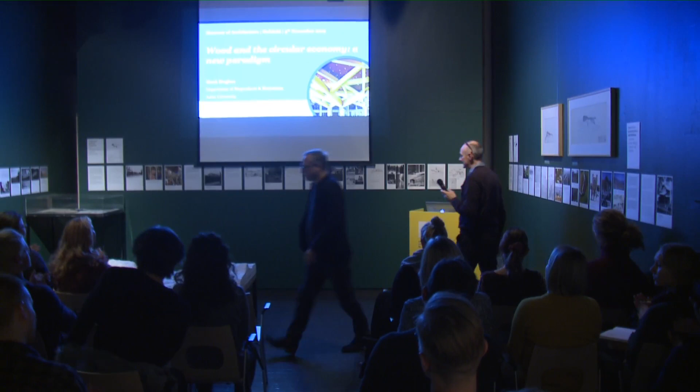Thank you, Pekka, and good evening. I hope you can hear me okay - I've got a bit of a head cold, so if I sound as though I've got cotton wool somewhere in my head, it's probably because I have. I would like to share some of the work that we're doing currently, and have been doing now for, I guess, 6, 7, 8 years at Aalto, looking at the issue of not just circular economy. When we started thinking about it, we didn't really think of it in terms of circular economy.

It was more about resource efficiency. I think the term circular economy hadn't really been coined at that point to any great extent, and it's only in the last, I guess, 5 years or so that it's really taken off as a concept. A little bit like sustainable growth, I think circular economy is slightly oxymoronic, in the sense that I don't believe you can have sustainable growth, and I don't believe you can have a truly circular economy either. There's always going to be losses in the system, but that's another point, maybe come on to that later in the presentation.

I have to confess to being very nervous because I've never spoken in front of a crowd of so many architects. So I'm a mechanical engineer by background. I found my way into wood about 25 years ago. So a lot of the concepts when it comes to the use of wood in buildings, I would have to say I'm not really that familiar with. So please, shout me down—maybe not shout—but just point out where I go wrong, by all means.

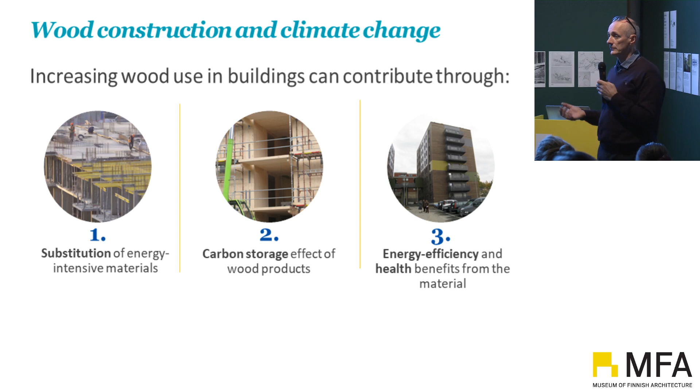But I think nobody really disagrees with the fact that there's a great potential to increase the sustainability of construction by utilising more wood.

So we certainly need some kinds of mechanisms or incentives in order to promote the use of wood in construction. It's not happening at a sufficient rate. In certain areas, residential buildings for example, it's well established. But in other areas, multi-story buildings for example, there's a lot that could still be done to promote and roll out the utilization of wood.

We are faced with some possible problems in the long run, namely supply shortages. We know we have a big forest resource here in Finland, with something like 100 million cubic meters of wood growing annually, of which we cut and utilize something like 60 million cubic meters annually. You would think there's potential to increase the amount of wood going into wood products of all sorts, not just wood construction, but also paper products, chemicals, fibers, and things like that.

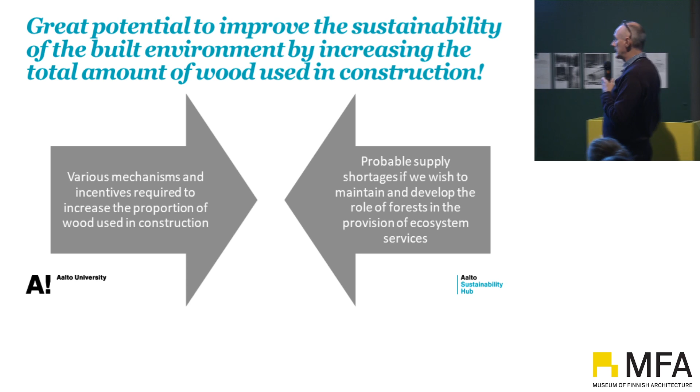But there comes a point where we can't take more out of the forest without seriously having to think about the loss in biodiversity and other ecosystem services. And if we think about maximising the climate change potential of utilising wood, we need to think about the resource. I think all too often we don't think enough about the resource base - where does wood actually come from, and what are the implications of utilising it?

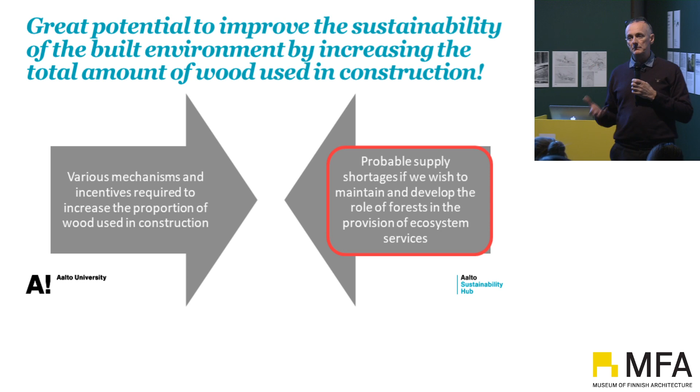So we need to have this in mind. There have been studies done to say that within the next 10 or 20 years, we're going to run into some problems when it comes to the sustainable supply of wood fibre. So the question really arises: what can we do?

How can we maximise the storage of carbon in wooden buildings? How can we maximise the benefits of substituting other materials, without compromising the ability of forests to sequester carbon from the atmosphere, act as a sink, and also retain biodiversity and other ecosystem services? That's a big question that we have to grapple with.

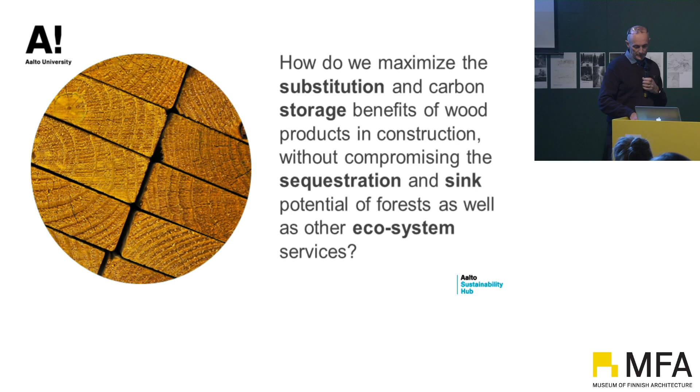And this really requires a slightly different approach to our thinking. We need to think at a very much a systems level. We can't think of things in isolation. We can't just think about only the wood value chain, only construction, or only forestry.

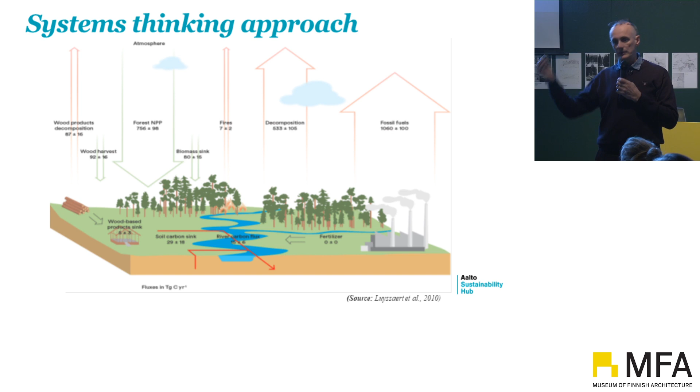We need to include all the various actors and stakeholders in this system to create a compromise and an optimized system that maximizes the potential of wood, both in the forest and in the built environment, to store carbon and mitigate climate change. So we need to think about it in this kind of systemic way, and this is something we're now starting to approach the problem from, rather than looking at single issues.

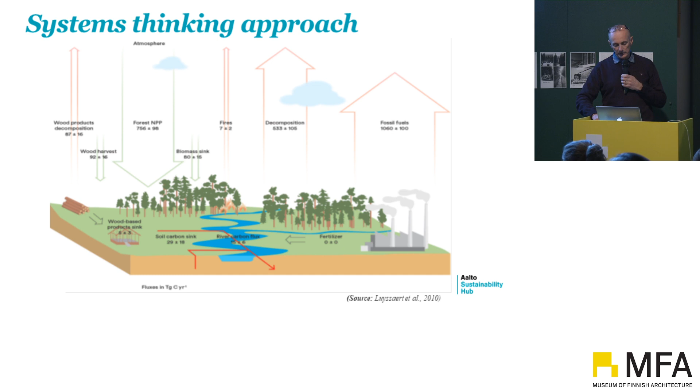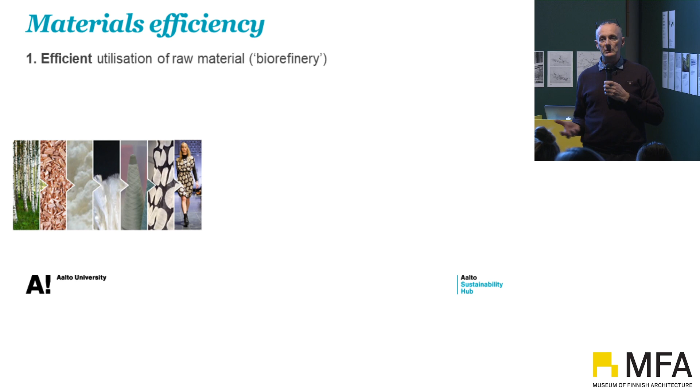So I was talking moments ago about resource efficiency, or materials efficiency, which is where we really started this discussion. And of course, we can think about efficiency in different ways. When we think about the application to the wood value chain, we could think about the efficient utilization of the raw material - this is something that the forest industries are very good at.

So a unit of biomass, a log, can be broken down into sawn timber, it can be broken down into chips that can be used as a feedstock for making various polymers or fibers, paper products, a whole range of different things. What's left over can be used in other material applications or to produce energy. So it's an efficient way of utilizing materials already.

There's a couple of examples here. Aalto has done a lot of work looking at producing, for example, alternative fibers to cotton and other fossil-based fibers for textiles. But these are based then on forest resources. So there are many ways in which we can increase the efficient utilization of biomass.

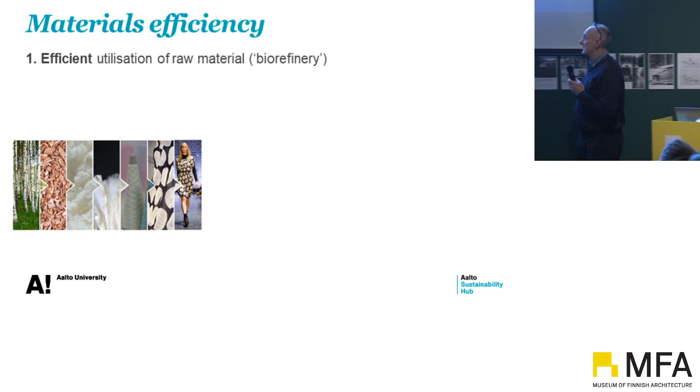Another way we can look at efficiency is through the longevity of products. Everybody says we live in a throwaway, disposable society, and I think that's true. In my lifetime, I think we've gotten away from repairing things to just throwing things away. It's crazy, utterly crazy.

There are plenty of examples of old buildings that have been around for at least centuries, maybe 10 times over. By having an extended use time, that has the benefit of storing the carbon for a long time and also being very efficient with the use of raw material.

The other thing we're certainly not very good at is thinking about what we do after the use of wood. When wood is torn down or removed from buildings, we usually end up with a pile of often broken bits of wood, which are then difficult to reuse. We don't really think about reuse much in products, full stop. Most products are made without really any thought to how we recover the materials.

Some of these are very valuable materials, certainly in the case of wood. The picture on the right, the bottom right picture, was actually done by a student group maybe 6 or 7 years ago. They decided they wanted to look at this idea of cascading - how could they actually produce something from waste wood? They came up with this idea for a coffee table. It was rather nice, it worked very well, and demonstrated that you can actually do something with just broken bits of wood.

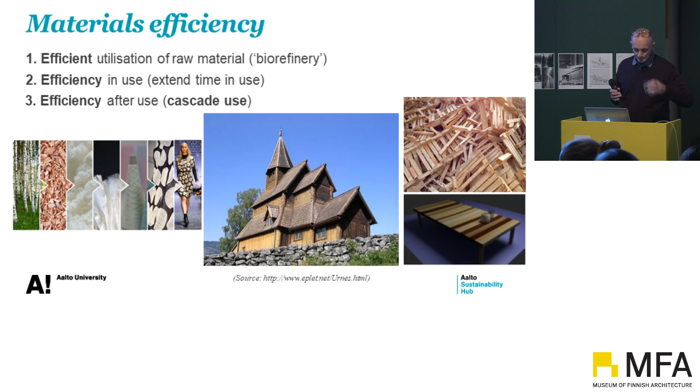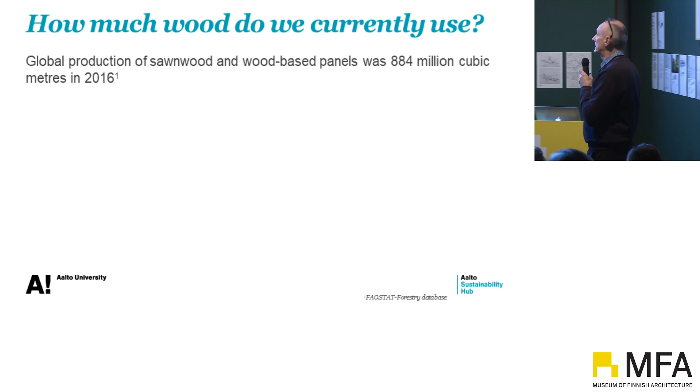We produced in 2016, according to statistics from FAOSTAT, about 884 million cubic meters of sawn wood and wood-based panels. To put that into context, that's a cube of wood product approximately a kilometre tall. As architects, you'd be interested to know you could put the Eiffel Tower 3 times on top of each other in that box.

Of course, not all of this goes into construction, but a large proportion does. So there's a lot of wood material going into buildings on a regular basis, and other products too. That is equivalent to about 750 million tons of carbon dioxide.

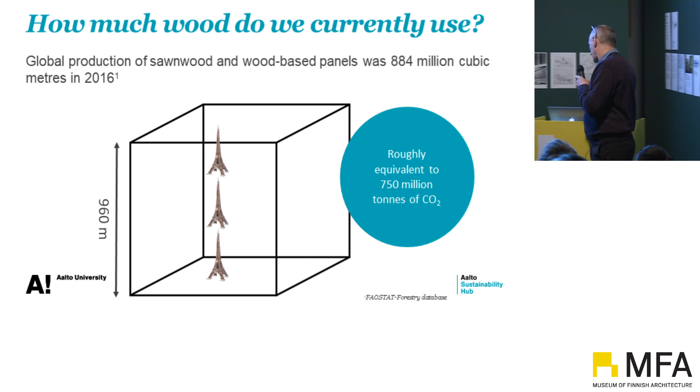So that wood that was manufactured and removed from the forest - you could argue that removing it from the forest creates an environmental problem, but by retaining the wood in solid, material form and placing it into a building, you are storing the carbon there and substituting other materials that would otherwise be used if you weren't using wood.

So we can think of the built environment of buildings as a little bit analogous to the forest. It's a kind of resource, a store of materials - an urban forest, if you like.

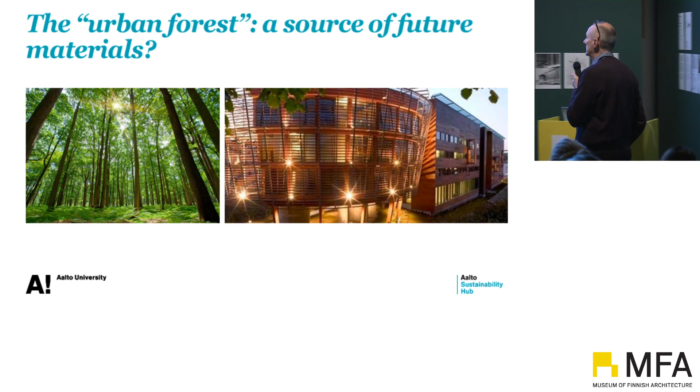How much is actually available? We've been involved in a few studies, and from a study conducted through a European project we were involved in, which finished a couple of years ago, approximately 32 million cubic meters of solid wood is present in residential buildings in Austria alone.

I haven't put anything on the slides here because I've only just had the thesis, but I've had a student working with me for the past 6 months looking into the potential amounts of wood here in Finland in residential buildings. The value she came up with was 17.1 million cubic meters - a very significant amount of material embedded in the building stock at present.

So why don't we use it? Why don't we actually make use of this? The prediction for Austria - and I think we'll probably find the same here in Finland - is that this amount of material will increase, so there'll be an increasing amount available to be utilized in the future.

One of the concepts we've been working with, and I'm sure Satu will also be talking about this, is resource cascading. The idea here is that rather than lose the quality or value of a material simply by disposing of it, you retain the value or quality by reusing it either in other identical applications or in other applications that have a high quality requirement.

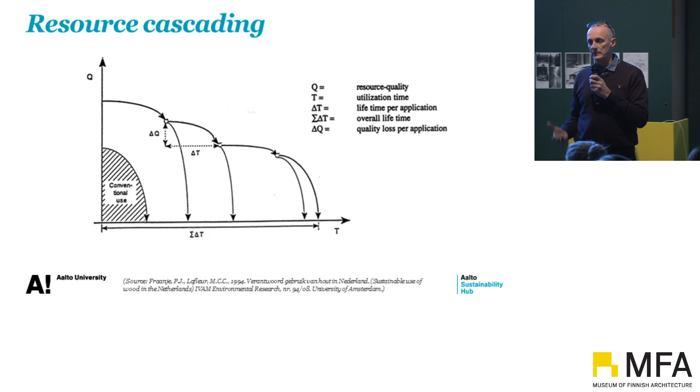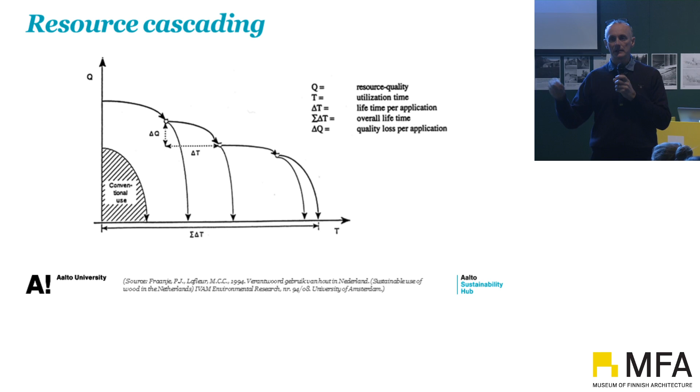And you can repeat this in a cascade until eventually, by the time you've reprocessed it several times, the quality has been lost and there's not much else you can do with it. But you have had a lot of utility, a lot of use out of that material throughout that time.

So this is the concept of cascading. Conventional use is what we do currently mostly: we have a material, we use it once or twice, and then throw it away. The idea with cascading is that we extend the period of time so the quality is retained for longer. If you think about carbon storage, we retain more carbon for a longer period of time, therefore we have a more efficient use of material.

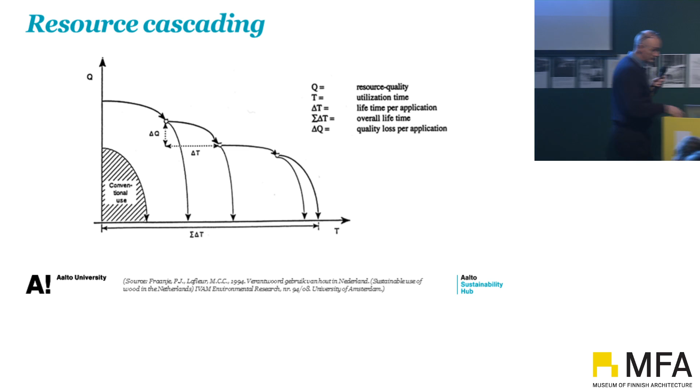Could you not give an example of a product where the service life could be extended like that? You've preempted my next slide. You're always doing that. I know.

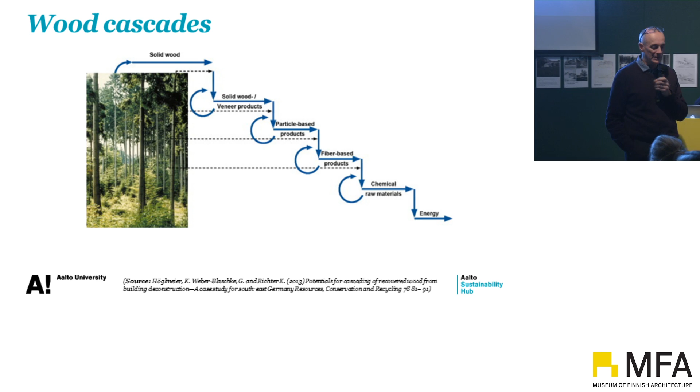So this is an example of a wood cascade. We might start out with, for example, solid wood, and then there could be subsequent solid wood products. It might be from a large beam that has to be reprocessed slightly to make a smaller beam.

And then once the beam has lived its useful life, it has to be converted into particles, which could be used to produce particle board. After that, when the particle board has maybe been in a piece of kitchen or bathroom furniture, it's reprocessed again to create fibers. The fibers can be used in some fiber-based product, maybe some form of packaging, and then even the fibers could be recovered and reprocessed, chemically processed into chemicals or textile fibers, and eventually reclaimed and used for energy production. So providing we don't lose material through the system, that material will always be available for energy production—it's just that we've made more use of it in intermediate products throughout that period of time.

But this is the situation currently. This is what we tend to do: we take solid wood, chip it up, and then produce energy. And that's not a bad thing necessarily.

Because although we could make more use of it, we also have to consider what other inputs we would need to create these cascaded products. If the inputs exceed the benefits we would actually gain from doing that, it doesn't necessarily make sense. Maybe an extreme example: if we had lots of fibers, we wouldn't want to try to stick them all back together to make a solid piece of timber.

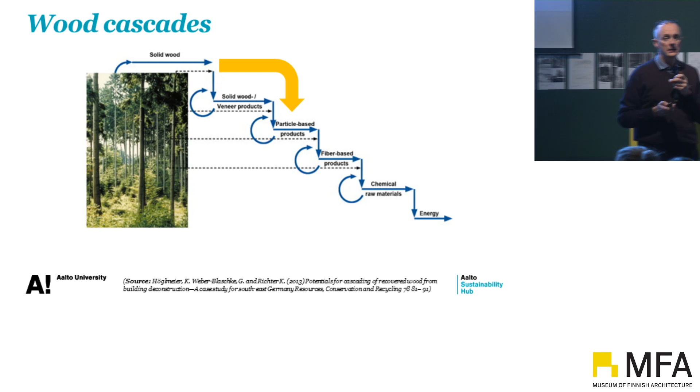But what we could strive to do is create a step in here, for example through the production of particle board. We don't do that here in Finland because we don't have a large particle board manufacturing base, but in many parts of Europe, Central and Western Europe, particle board manufacturers already utilize quite significant quantities of recovered material—not from buildings, but from things like pallet wood, because of the cleanliness of the material. So many particle board products are already incorporating maybe 70–80% of recovered wood in their production.

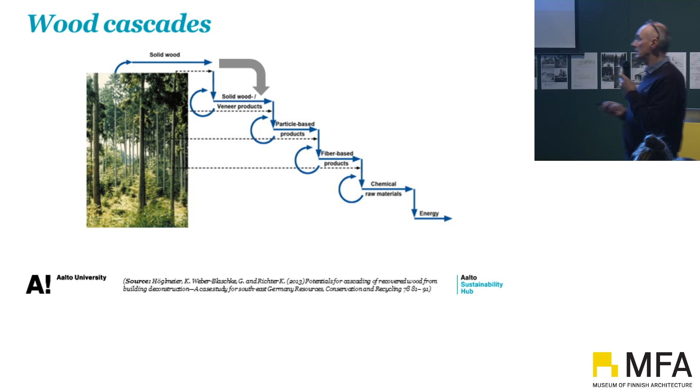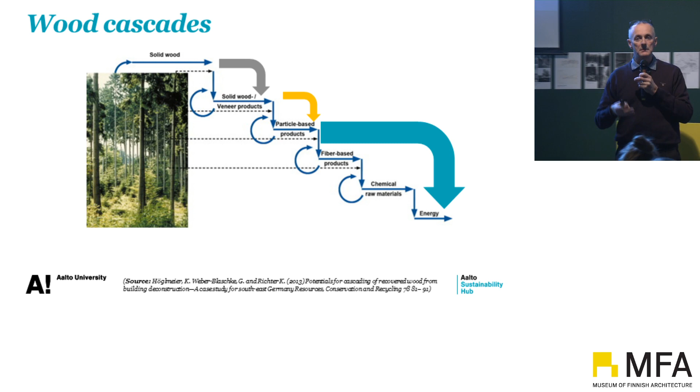And that particle board is then available for the production of energy at the end of the day. What we would like to see is actually another step where, first of all, the recovered wood would be utilized in a solid wood form before being converted into particle board and eventually burned. We may be able to put another couple of steps in there as well, but I think realistically, if we could go from solid wood to another solid wood application and then to particle board and finally for energy recovery, we would still have an important positive contribution to make.

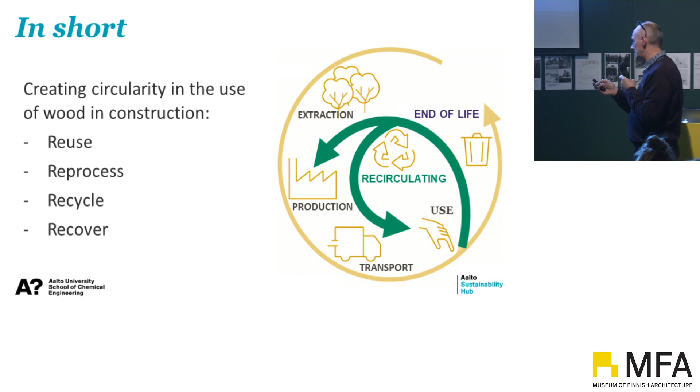So in short, what we're trying to achieve is, I think everybody's familiar with the terms reuse, reprocess, recycle, recover, reduce, reuse, recycle. It's well known. So if we could reuse components from buildings, either in existing or slightly modified form, that would be an ideal situation. If we can't do that, if we could do minimal reprocessing to enable the material to be reutilized in solid wood form, that would be great. If we can't do that, there'll be fractions we can't recover in solid wood form. We could then recycle that into particle board, or finally use it for energy recovery.

So we're trying to ideally create more circularity into the system. So what's the problem? Why don't we just do it? Well, this tends to be the issue.

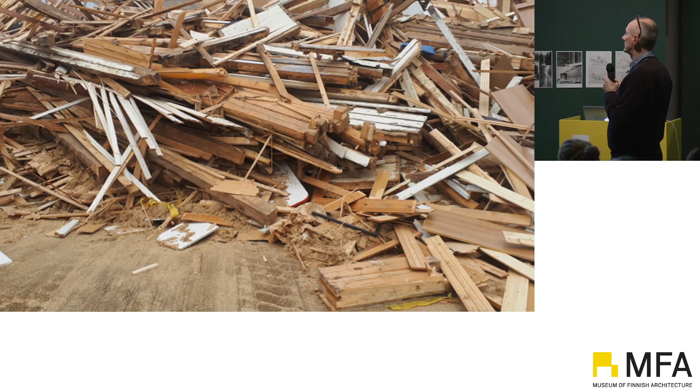Go to a demolition or waste management company, we tend to see lots of bits of broken wood, looking rather similar to this kind of picture. We have wood that's mixed with other materials, it's coated, it's in the form of systems, part of a wall system. There are often adhesives or insulation materials, certainly lots of metallic components in joints and things like that. These all make it rather difficult, and during the demolition process the only relatively quick way to do it is to smash it with a grab effectively, and that breaks up the wood. So a lot of the intrinsic quality of the wood is actually lost in the demolition process.

And these are some examples of the type of... It's a piece of art. Yeah, actually, yeah, I was going to say, I thought it's the right form, isn't it?

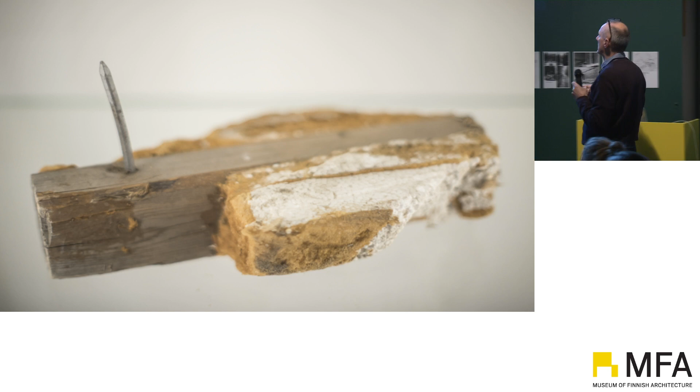Piece of art, these are actually taken from our exhibition in Aalto. But this is quite typical, you see a lot of nails protruding. Actually, I recovered some of this personally, and last weekend spent quite a few hours removing the nails so I could reprocess it. Other things you see in addition to nails are plastics, polymers, insulation materials, sort of polyurethane foam here. It looks like Styrox, so all sorts of different things that are adhering, which make it difficult to clean.

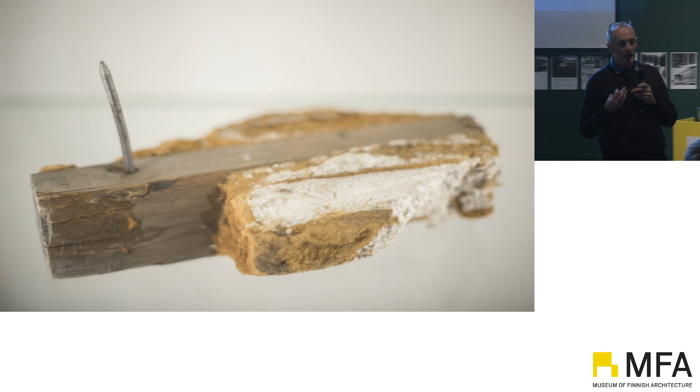And the other thing that's perhaps more problematic are the chemical coatings and preservative treatments that are often rather difficult to actually identify. So that's one of the problems with the practical recycling of wood.

So I'm going to mention a couple more projects. I'm very pleased that Petri is here because this is actually funded by Petri's program. The Circwood project - what we're trying to do is really to understand, if we were to recirculate, if we were to recover wood in a form that made it more suitable for cascading, what would be the implications in terms of sustainability?

So what we're trying to do is look at hypothetical scenarios where, okay, what if we were a little bit more careful with our dismantling of the buildings? We use some kind of smart demolition practices to recover the wood in a better state. What effect would that actually have?

Another thing would be, and I'm going to talk about this because I think it's an important point to make, is design for disassembly. What about if all the buildings that you build and design from here on in are built so that they can be fully dismantled, so you recover all the materials? That's a challenge to you as architects. If we could do that, what would be the impact?

If we could recover the wood materials from those buildings and reutilize them in different products - we could either use them in new buildings, different buildings. If not into buildings, what about into furniture? What about other such things? So what effect would this then have on the sustainability? So we're trying to model that, trying to understand what the impacts would be.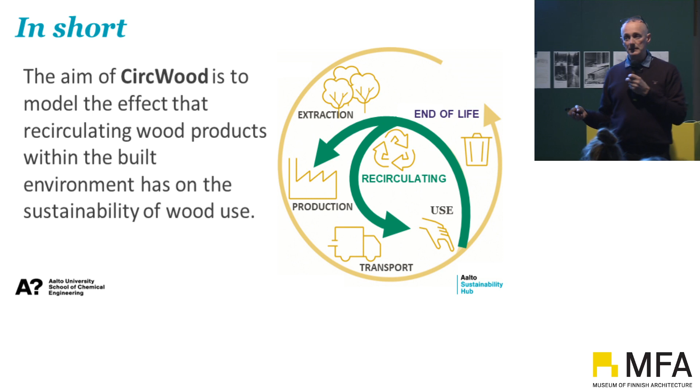It's challenging because it's difficult to assess what the current practices are, because they vary quite a lot. And what would smart demolition practices actually look like? And as for design for disassembly, well, we've really got very little clue about what that would mean in reality.

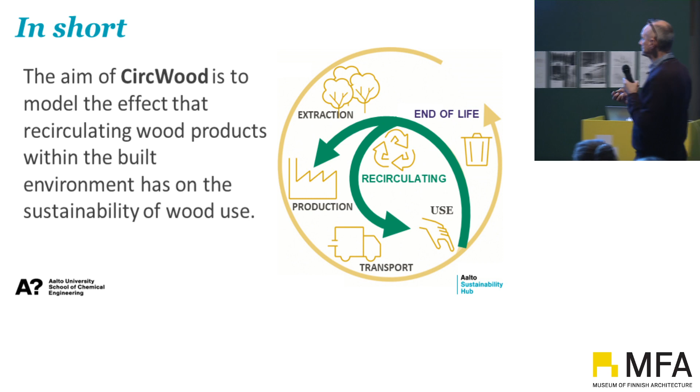So the idea would be that we would see what would happen if we could shift the emphasis from this end of the spectrum more to the reuse and reprocessing end of the spectrum by the introduction of a design for disassembly paradigm.

I think I've probably stated this already, but current demolition practices aren't really compatible with material recovery. They're compatible with quickly demolishing the building so it can be moved on to the next phase, which is usually rebuilding another building on the same site.

So we have another project we're now working on. We're entering the third phase of this project called Rewood. I'm not very imaginative with names for projects - this is Rewood 3, this is Rewood 2, and we had a Rewood 1. Not very imaginative. I'm an engineer, so that's my excuse.

But what would happen if we could design buildings that could be disassembled? Or maybe not disassembled - we're not talking about disassemblable buildings, we're talking about buildings where we can recover the materials and reuse them. Not a modular building rebuilt somewhere else, but a building where we can recover the materials and reutilize them.

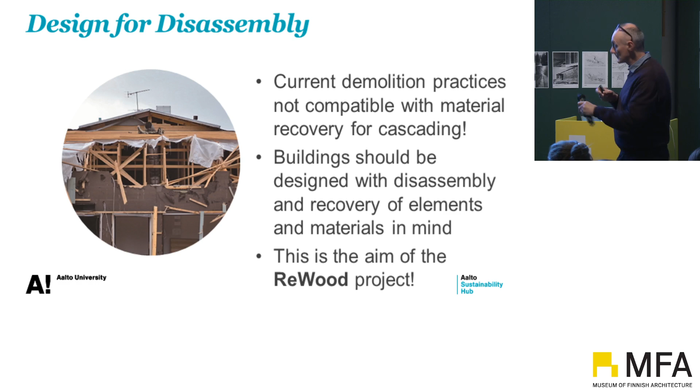So I'm going to close now. I'll just mention the projects we've got running, as they might make some connections here. We have a project called the GoWood project. This is funded by Climate KIC - some may be familiar with the EIT, the European Institute of Technology, KIC's Knowledge and Innovation Communities.

We have a project where we're working with the Ministry of Environment, Sitra, and UNFCCC to look at digital technologies to account for carbon. The reasoning is that if we can say with precision what the carbon content of a building is, and what implications design choices would have on that carbon content, that would help us create incentive mechanisms to support the utilization of wood and roll out wood construction.

We have another project, again funded by Climate KIC, working with partners in Sweden and Switzerland to develop a tool that would allow stakeholders, designers, architects, and decision makers to make decisions about materials used in buildings, to select the most sustainable choice. Often we believe it would be wood - it might not always be, but it would allow them to make an informed decision about the sustainability of the building.

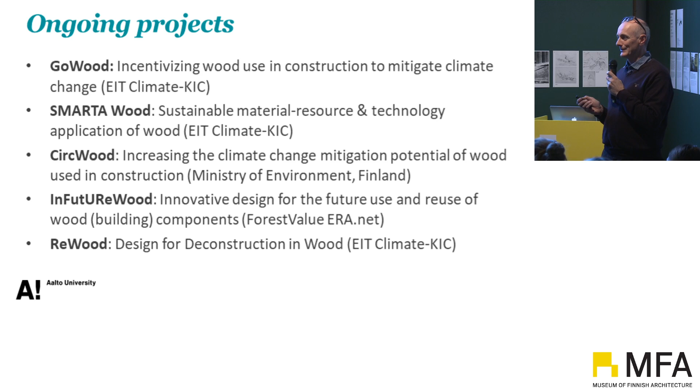If there's an invitation at a future point, I'd be happy to come back and tell you more about these projects as they continue. I think I'm more or less out of time - I managed to make 27, or 25, slides last quite a long time already.

Just some final thoughts, or aspirations. I think it's certainly important as we go forward that we adopt systems thinking and involve all stakeholders. I'm an engineer, a scientist, used to being in a laboratory by myself or with a few colleagues, not thinking too much outside that realm. But it becomes increasingly important that we involve all stakeholders in this process, because there's always the danger that we say 'let's all make wooden buildings' and then suddenly find we've run out of forest. That's not a very good situation to be in.

About this kind of materiality of products, then thinking of buildings as material stores. I know this is already changing, and there are very good examples of projects that are looking at buildings as material banks. I think this is something we maybe need to think more about. How can we consider that, yes, it's somewhere we have as a space to live or work, but also how can we think about the materials that actually go into the construction, to retain those and give them value. I think materials need to be given value.

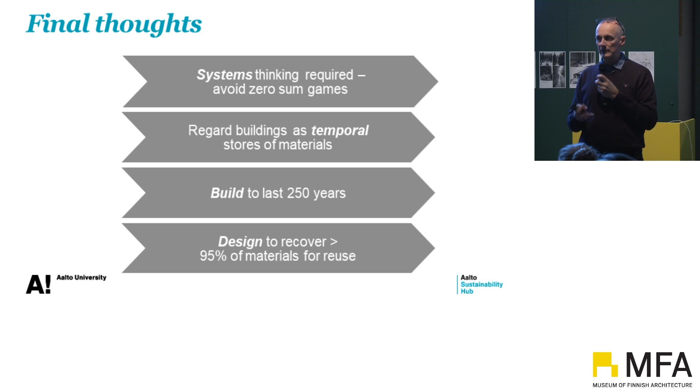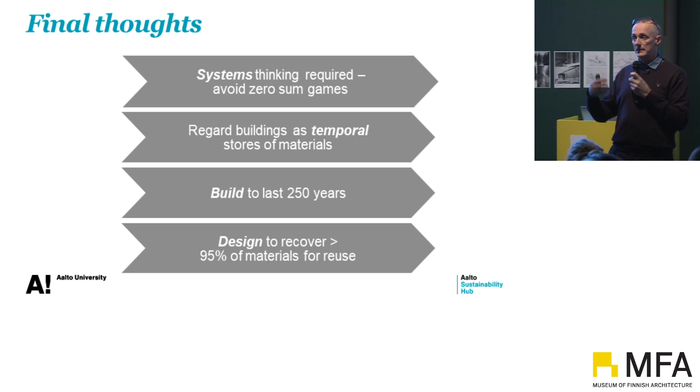Maybe when we're talking about design for disassembly, we should also be thinking about design for adaptation, so buildings can be more adapted to suit new purposes. And certainly we should be thinking too about designing buildings where we can recover the majority of the materials. I have to admit that a lot of products we use that go into buildings are actually quite complex. It makes it very challenging to recover the materials in the first place. So we maybe need to go back also to the point of the manufacture of the products, to think about how they could be produced in a way that would make the recovery of materials much easier.

Very happy if anybody would like to make contact, really happy to talk more about this. I'm always looking to engage, particularly with architects, to get their opinions. A lot of what you might think I've said is a load of rubbish, I don't know, but we certainly need to understand this in the idea of working with stakeholders. We need to work with stakeholders to try to understand what the issues are, what would help to promote the utilisation of wood, and also this additional part of the circularity, the resource efficiency with wood construction. So, with that, thank you.

Thank you, Mark. Nice that you presented yourself at the end, because I forgot to do it. So, professor in wood technology in Aalto. Do you have a quick question while Satu Huuhka, our colleague from Tampere University, will fix the presentation. Satu is part of the building environment in transition research group and docent in Tampere and researcher as well. Satu finished her doctoral thesis or degree about 3-4 years ago.

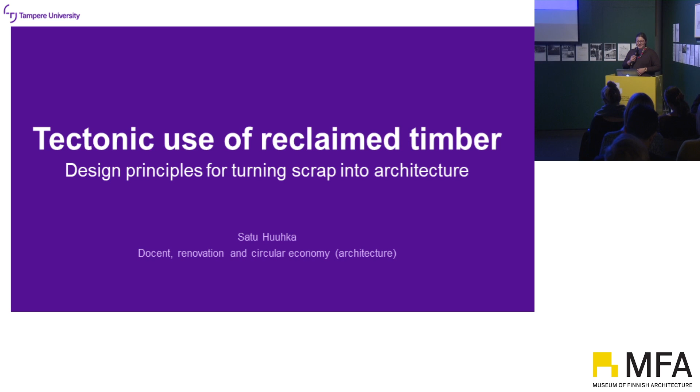So I'm going to talk to you about tectonic use of reclaimed timber and how to turn scrap into architecture. Like we heard in Mark's presentation and like we've heard in the media and elsewhere, timber has been proposed as one solution to climate change mitigation in the construction sector. And it is, but disposing or recycling timber can be more complicated than recycling concrete or recycling steel. We're not supposed to landfill timber, and if you burn the timber, it's not really recycling. Even though the energy production can be useful, it is not recycling.

Here in Finland, because of the way we've built in the past and still do, the majority of buildings that are demolished are timber buildings. They are generally very small buildings, so even though they make the majority in numbers, in terms of the material that originates from them, about 1/3 of the demolition waste is assessed to be wood, maybe a bit less. But it seems that wood might be the largest waste stream, together with concrete, as large as concrete waste.

As Mark informed us, if we reuse or recycle timber, we can lengthen the time that the carbon stays stored in the material.

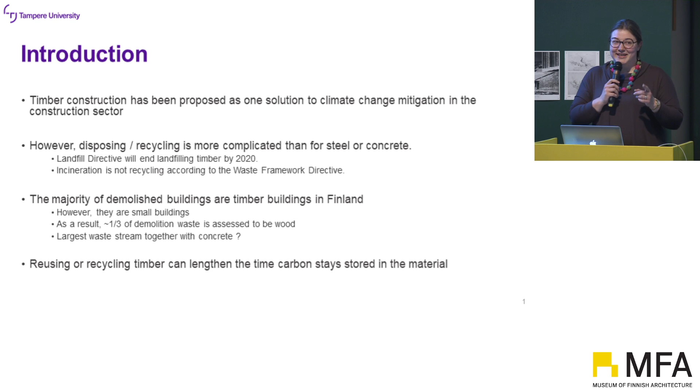You didn't show this image though. I think everyone knows this from the Ellen MacArthur Foundation, this is a redrawn version by my colleague. So here we have the idea of the circular economy system where we have the biological cycle on one side and the technical cycle on the other side.

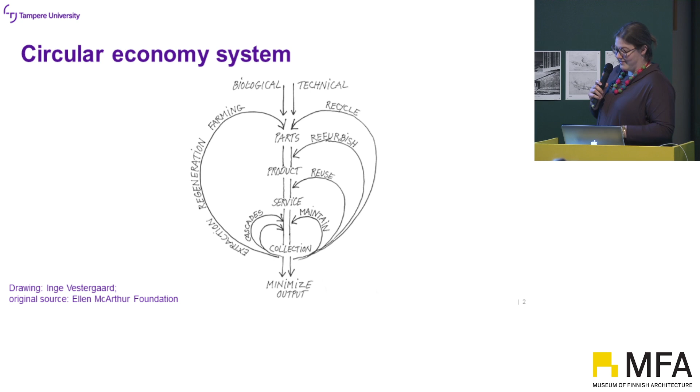Now you can think that, okay, wood is biological, so it can enter this cycle quite easily. And were we to build like we did in the old days, that would be true, in the archaic way, where almost all of the material in the building was wood. But the way we build today, that's not exactly true anymore. The way we use wood in buildings, it's engineered wood, so it doesn't automatically enter the biological cycle. Like Mark mentioned, it has glue, paint, and other substances that prevent it from entering the biological cycle. So we should actually treat it as a technical material rather than a biological one in terms of the circular economy system.

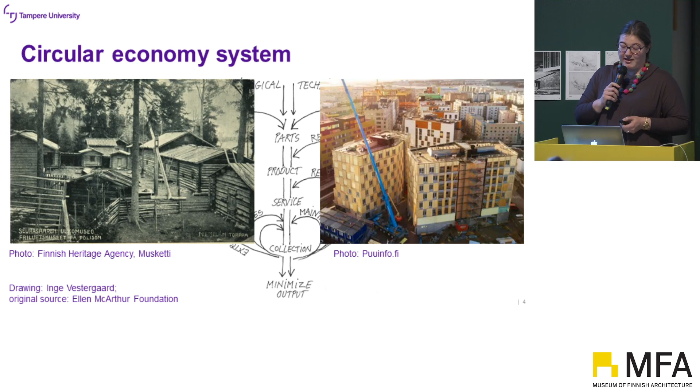This is basically the same image that Mark already showed you, the stages in which you should proceed. You should start always by preventing the creation of more waste, and then reuse, recycle, and utilize in other ways. This is basically the same as the cascading cycle.

If we translate that to buildings like Mark did, we have what he mentioned in the case of new buildings, designed for deconstruction, but even more importantly, the service life extension. Every year, the amount of new buildings is only 1% of the existing stock. So whenever we are talking about component reuse or material recycling, we're actually dealing with that 1%. It's more important to work with the existing stock to extend the service life, because that's where you can achieve most impacts.

However, I'm not going to talk too much about that today, because I'm also talking about reuse and maybe bringing it a bit closer to construction. So I'm afraid Pekka will have to arrange another lecture for the repair point of view.

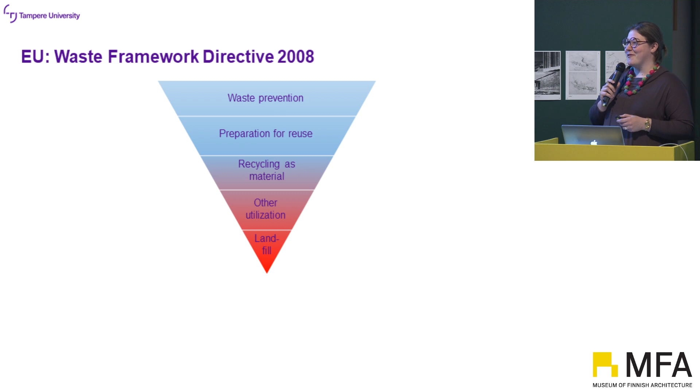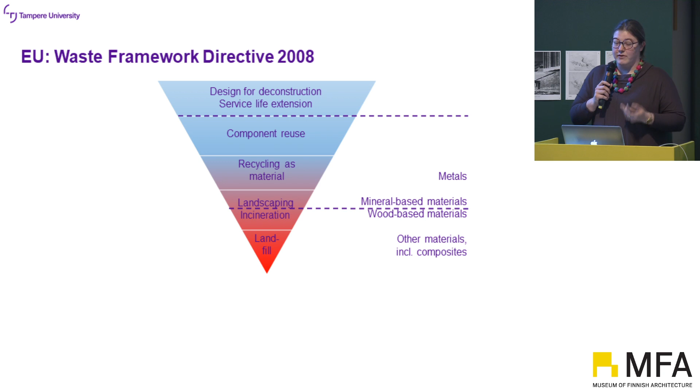In the EU, we have a target that we should be able to utilize 70% of the construction waste as material. That would mean reusing, recycling, or also some landscaping actions can be considered to belong to those categories. And here, wood is a little bit problematic, because what we do is that we incinerate it to create energy. So we should find a way that we could also increase the level of quality in the wood utilization.

If we compare it to the other materials, such as concrete or steel, here you can see what different options we currently have for reusing, recycling, or other utilization. And as you can see, we don't really have that many options here. One of maybe the problems with wood is that to recycle wood, all we can do is make fiberboard. Of course, there's always room for innovation, but if all we can do is fiberboard, you can't build structural frames out of fiberboard. So to build structures, reuse is currently the only feasible option that we have.

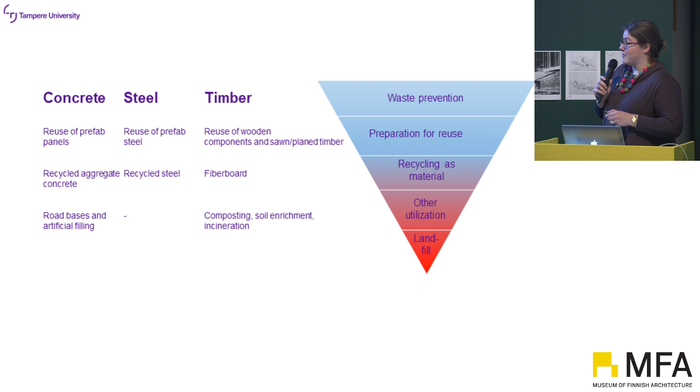So it interests me as a researcher what we could do here in the first steps of this process. A large part of my research has focused on the properties of demolished buildings, because I wanted to understand the properties of these materials and also the properties of the buildings that are being demolished, and maybe to think about how we could avoid that demolition in the first place.

But if we take, nevertheless, the viewpoint of the material, looking at the buildings that are being demolished at the moment, we can say that these are the two basic types that are the most common. The wood waste comes from these small buildings, which are either the traditional log buildings or the post-war reconstruction era buildings with balloon frames.

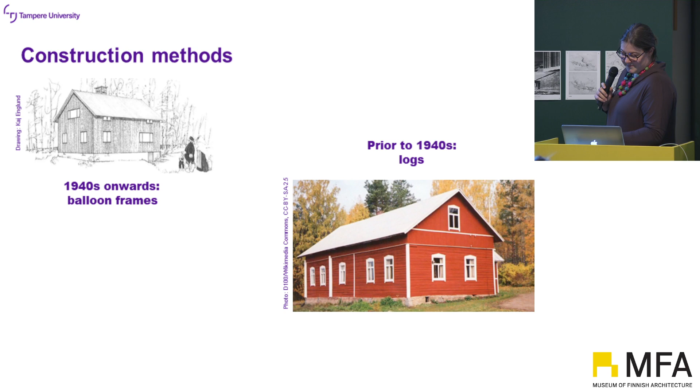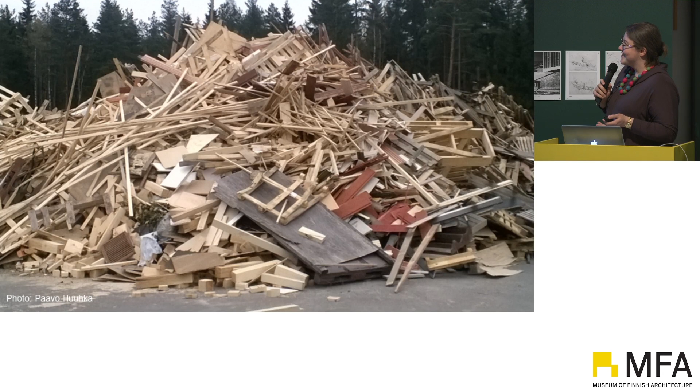And the challenge is, like Mark said, that when the material comes from the demolition site, it doesn't look like this. I have the same image as you did, almost the same. It looks like this. And the reason is the way we demolish at the moment.

It would be possible if we use different kinds of demolition methods to get more value out of the demolished material. Mark's student, Daishi Sakaguchi, made a field study where he followed the demolition project of a daycare center, and he recorded what happened to the length of the timber components in that process. There are some cross-sections of timber which retain their length quite well, like the smallest one and the largest one. But the cross-sections in the middle had a really drastic loss of length as a result of the demolition.

So if we wanted to avoid that, we should employ deconstruction practices that would be more labor-intensive and use less machinery than the ones that we currently use. That way, it would be possible to bring the recovered material closer to the virgin material in terms of its properties.

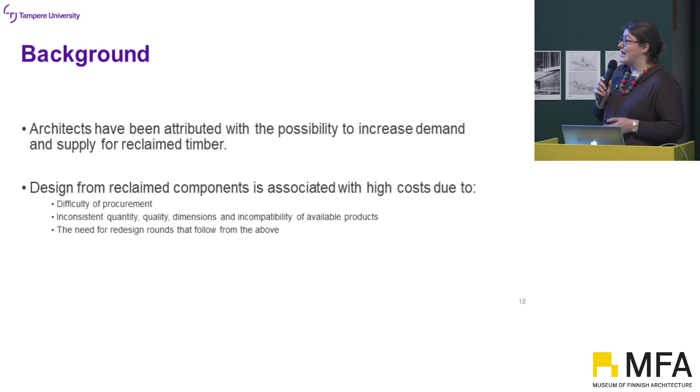And even if we use the best deconstruction practices, there are still challenges because if you use reclaimed components, it might be quite difficult for you to procure them. Where do you find the material that you're looking for? The quantity and the quality is inconsistent, the dimensions may be inconsistent, and they may be incompatible with current modular grids, let's say, and you might have to do a lot of redesign to overcome this problem.

So one of my key points is actually that the reclaimed timber is not the same material as the virgin timber. We should think of it as a completely new material in order to increase its use.

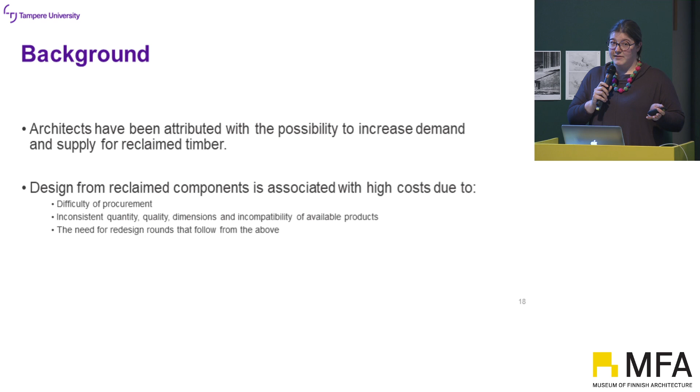And this is where we get into tectonics. I don't know if you're familiar with this term. Would you maybe raise your hand if you are? Okay, not too many, some, yeah?

So I have a couple of quotes here to introduce you to tectonics. It's one of my favorite theories of architecture. I'm a sucker for it. Ole Egholm Pedersen has said that structures are tectonic when the material and technique have a significant impact on the initial idea about form in such a way that the final structure can be said to be a consequence of the material and technique.

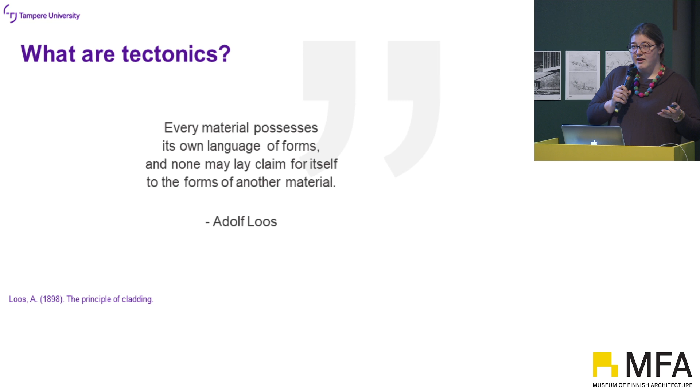Another way to put it is what Juhani Pallasmaa said: tectonic form derives from properties of materials, structural logic, and the crafts of making. Or the way Adolf Loos said, every material possesses its own language of forms, and none may claim for itself the forms of another material. So it is about finding an architecture that emerges from the material.

One more way to say what tectonics is about uses the example of the brick. This is from Louis Kahn. He used this in his teaching.

If you think of brick, you say to brick, 'What do you want, brick?' And brick says to you, 'I like an arch.' And if you say to brick, 'Look, arches are expensive, and I can use a concrete lintel over you. What do you think of that, brick?' Brick says, 'I like an arch.' The point being here that when brick is a material that doesn't have good tensile strength properties, you cannot make a straight lintel when using bricks. You have to make an arch. So arches are what is natural to bricks,

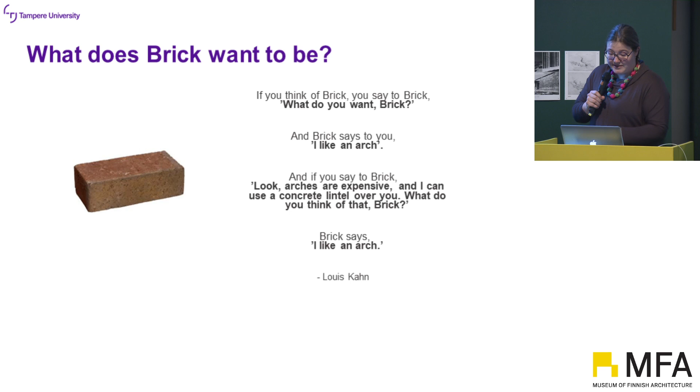Engineers have studied the properties of reclaimed timber, and they have actually found that in some aspects, aged timber is better than new timber. This is something that architects sort of know. But also there are some properties where the aged timber is inferior to new timber, and these just have to be taken into account when buildings are designed or structures are designed.

In brief, we could say that reclaimed timber is harder but more brittle than new timber, which you might have experience of in case you have ever deconstructed very old structures. Very hard, but can be quite brittle.

Reclaimed timber is also short. Daishi's study showed us that, but even if we use the best deconstruction methods, we still might have some damage in the wood that has to be cut out. And even if the nails are not too badly bent and you're able to deconstruct the piece, you might have

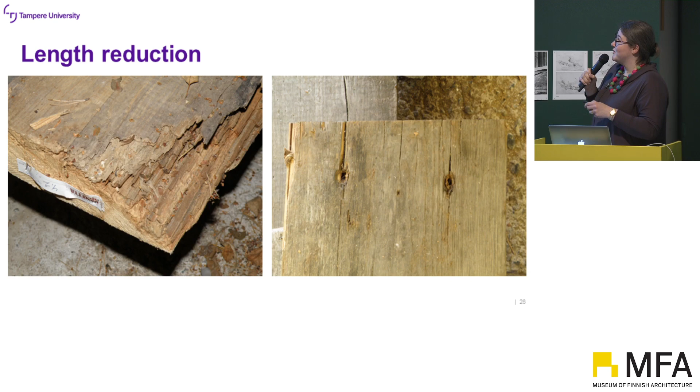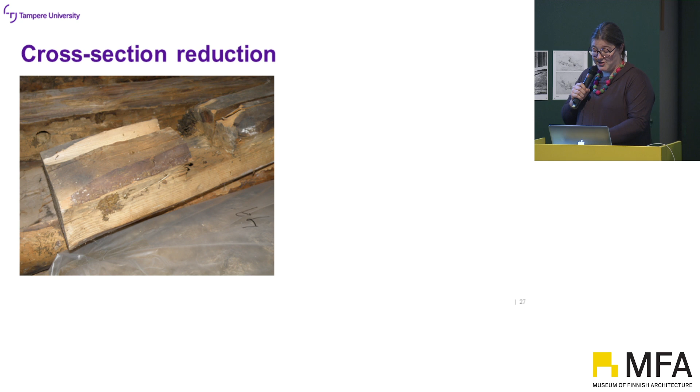these holes which might be unacceptable for you, so what do you do? You cut it, and it's shorter than it used to be. You also find these notches of different kinds, like here. So in this log you have a reduced cross-section in comparison to virgin timber. And of course, in many cases you can find that your timber components already have some kind of surface treatment. There is a paint, there is a color that exists.

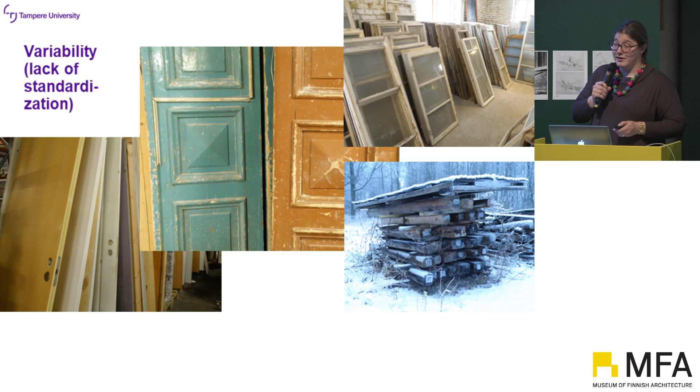And the pieces and bits that you can recover are very varied. They are not standardized. And this is what you have to deal with if you want to design out of reclaimed timber.

So we made a little experiment with students some years back. We have this, or had this course, it's been discontinued, but we had it, Finnish wood architecture at Tampere University of Technology, nowadays known as Tampere University. And this was a part of a project of ours, reuse, repetitive utilization of structural elements.

I gave the students the task to design out of reclaimed components. So I had 36 students, and they were divided into two groups. Half of them were designing an allotment garden cottage. So that was supposed to be like a product type of building, not a unique building, but something that can be repeated. And the other half was designing a cafe pavilion, which was more of a unique case, only to be constructed once.

So in terms of research, this can be considered a design simulation. The students simulated design by doing this exercise. And then afterwards, I made a qualitative analysis of the graphical material and also the essays that the students produced. And the results of this study have been published. This is openly available, so if you become very interested, you can find it online.

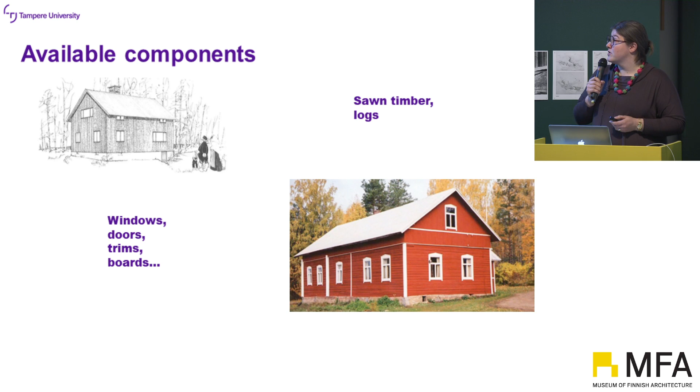The allotment garden cottage, this is what it is if somebody is not familiar with the term - a small cottage not intended for permanent habitation. And the students were to use for these projects any kinds of materials that you can procure from these typical buildings that are demolished: sawn timber, logs, windows, doors, different kinds of trims and boards.

For the cafe pavilion, which was to be located in the Pispala neighborhood, the students could also use glued laminated timber from this storage hall - these large-scale components. It's since been demolished, it no longer exists. They could choose what materials they would like to use. And out of their projects, I was able to distill these 10 principles for reuse design.

Divide the spatial program into smaller units, divide elements into smaller units, avoid equal spans and dimensions, distribute functions for different members, use efficient forms for long spans from short pieces, define ranges instead of fixed properties, rotate and repurpose, select the application according to the properties, combine creatively, and finally let the patina speak.

I will show you some examples of these. And on each slide you can actually find a quote from one of the students from their essays as to what they were thinking when they were making the project.

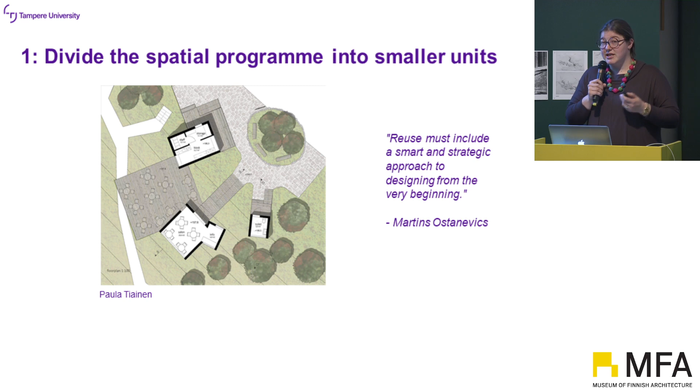The first principle being dividing the spatial program into smaller units, and that is simply because, like you just heard, the reclaimed timber is short. So if you design a very large hall, it might be quite difficult to find any spans to actually create that space. So if it is possible from the start to think about the spatial division so that you have smaller rooms, that could enhance reusing timber, like Paula Tiainen has done in this cafe pavilion. It's not necessary to actually separate the rooms physically like has happened here, but just to have smaller units instead of very large ones.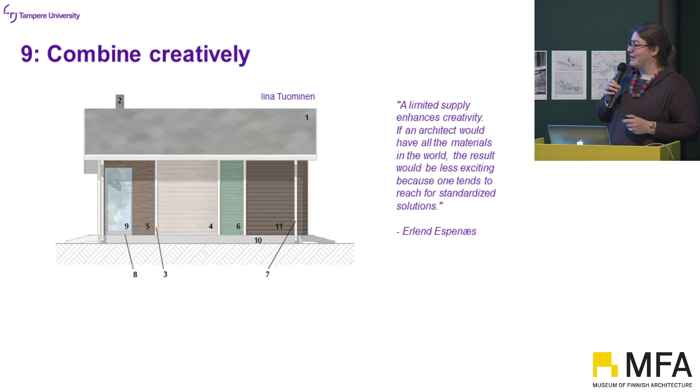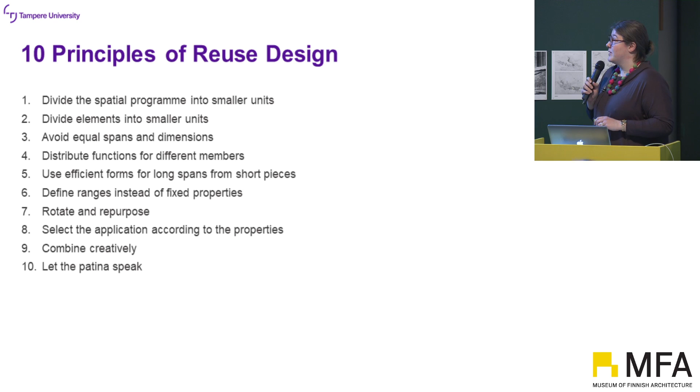So these have been the 10 principles of reuse design that could be distilled from the student projects. And to continue a little bit about the last one, the patina, I would like to talk to you also about spolia in contemporary timber architecture.

Is spolia a familiar term to you? You can raise your hand if it is. To some, yes.

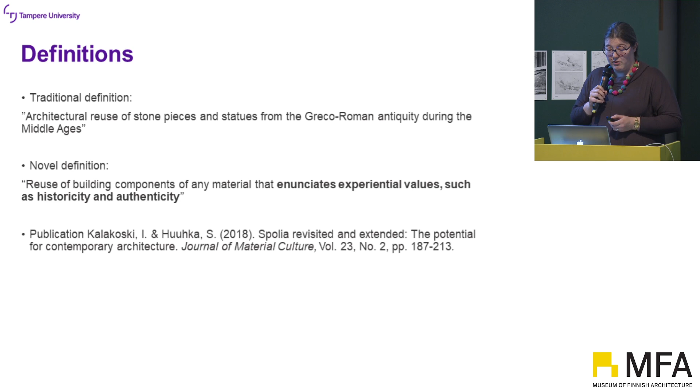And we propose that in order to be spolia, the reuse has to fulfill five requirements. Firstly, it has to be based on genuinely old material, so any new material made to look old will not do. Secondly, the source is important: the material must have its origins in an architectural composition that has since been destroyed, lost, or transformed.

Thirdly, the material must have a structural function in the new architectural ensemble. And with structural function, we don't mean just load-bearing functions — it can also be cladding, but something that the building wouldn't do without. So if the material were removed, something else would have to be placed there.

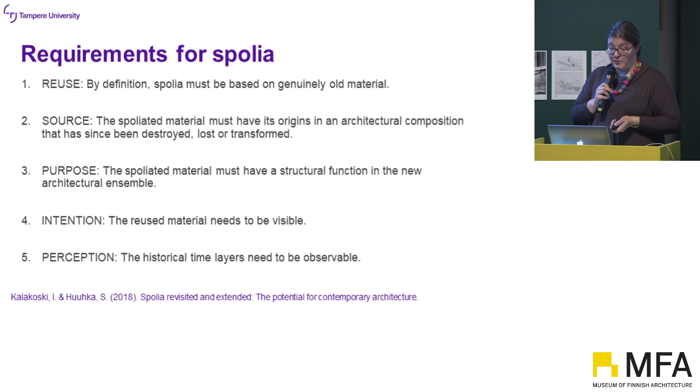Here are also some further Nordic examples of the kind of architecture where the material conveys some message from the past for the users to interpret in the present. Interestingly, all of them are actually made of logs, so it seems like logs have this quality of transferring some of these values to the present. Maybe it's a challenge then for us how sawn timber and engineered timber products could do this in the future.

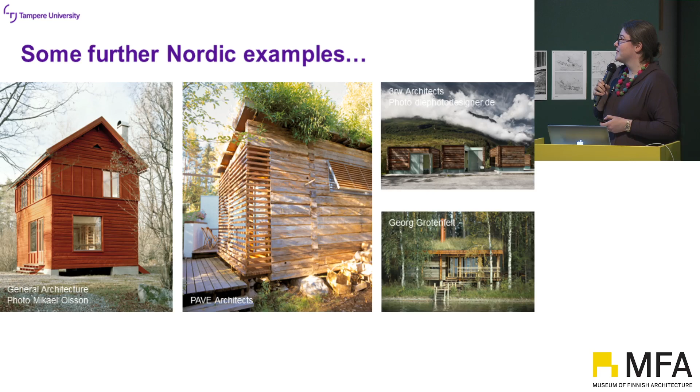To conclude, I want to say a few words about what you've heard from me today. I'd like to acknowledge that tectonic wood architecture from reclaimed components will not solve the large-scale environmental problems of our time, but I still think that awareness on tectonics and spolia may enrich and inform at least some of the architecture that we create today. At the same time, I think we should acknowledge that transitioning into circular economy in the construction sector may mean that we do have to change some fundamental issues in the way we build today. So maybe small-scale projects may act as inspiration and catalysts towards a greater change. After all, a journey of 1,000 miles begins with a single step. Thank you.

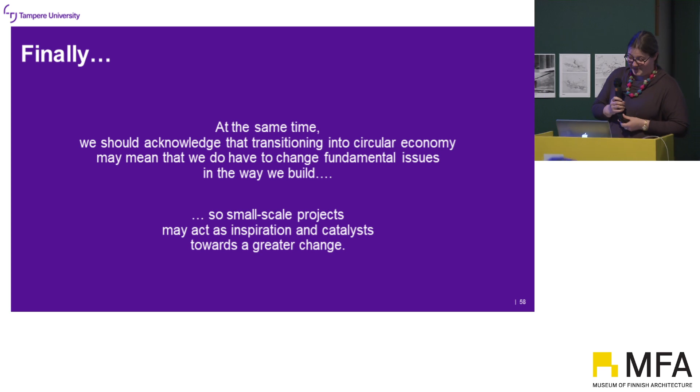Thanks, Satu. I totally agree with that. We, of course, always are questioned about working at small scale, but I think that's a very good scale to test things. By the way, about log and solid timber — one of my master thesis students kind of donated, or had, a few modular buildings from '69, which were in quite poor condition, used as a sauna.

She took the components to her summer place on an island, on a nice cliff by the sea. But unfortunately, the summer winds flushed the whole package into the sea, and little by little they started to collect them back after maybe several weeks floating on the sea. The glulam columns and all the solid wood components were in perfect condition, while all the plywoods and such things were totally demolished. So solid timber is an amazingly durable material.